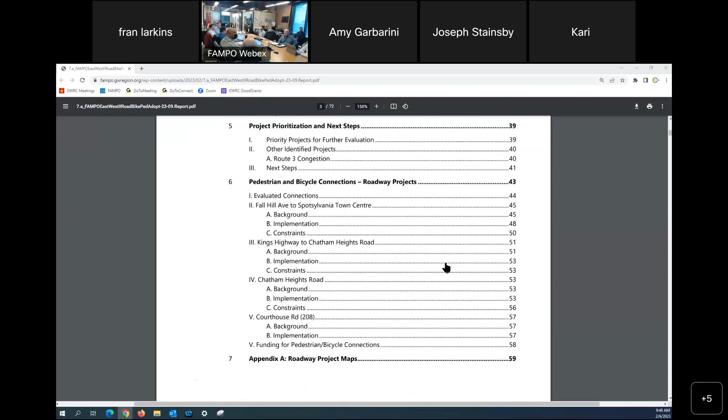Do you have a page number, really quick? It's near the beginning. Pull up the report, Curly. It's page Table 4, right, Paul? Yeah, table 4. Page 15. Okay, great, thank you. Page what? 15, that's where it starts. Page 15, but it's actual or PDF page 17, or 16 in your thing, if you're searching. There, yep, back up, that's 15. Is that the one, Paul? Yep, yeah, so page 15.

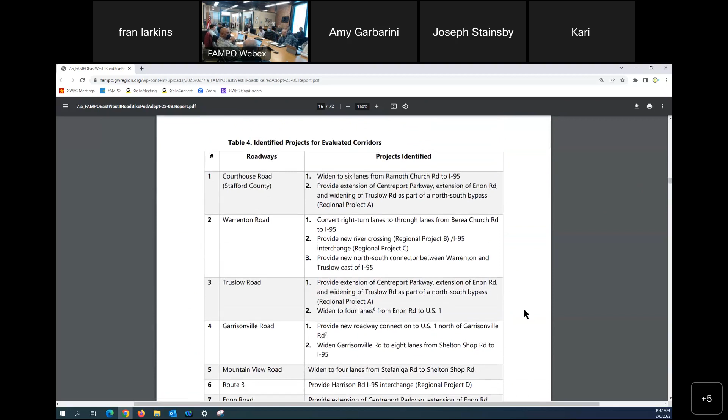So my question is, with regards to number 11, shouldn't that be 2 projects and not 1? Higher up on the table it basically lists 2 different projects. One would be the new river crossing, and the other would be the new interchange. Given that they're both pretty expensive projects, it would seem good to list them separately.

Yep, that's how we did it in other places, so we can make that change for number 11. Thanks for flagging that. Okay, thanks, Drew.

Any other questions or comments from anybody? So we've got 2 amendments from Matthew, which I believe Drew and Chris were saying is fine. They can make those changes, not a problem. And Paul's comment you've heard, they'll quite happily make that change as well. Any comments you want to make, Matt, on those 2 items?

Do you want me to mention them? Yeah, I would go ahead, just so everybody knows. Gosh, I do not know what page number.

The first comment was regarding the map showing the Western network, and it was showing the connection between Centreport Parkway and Courthouse Road as connecting at Austin Run Drive, where it should connect at Mine Road. So that'll be updated. The other comment was near the end of the document, describing the Western network and the proposal for that plan, adding a few notes to better discuss what improvements could happen regarding that project.

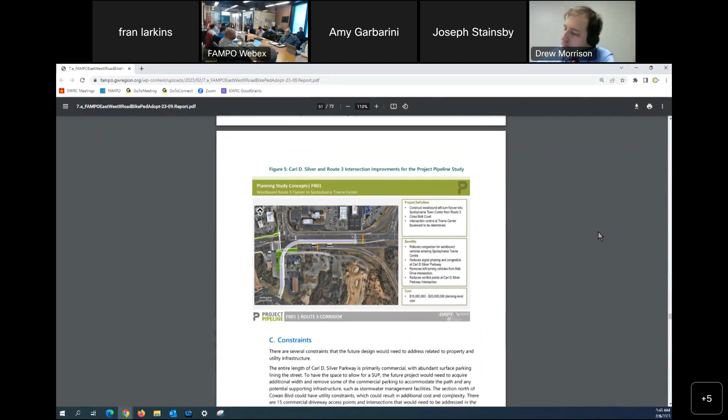It didn't mention anything along Centreport Parkway, and it didn't mention anything along Plantation Drive, whereas we'd be adding a road next to Centreport Parkway on both sides. We should see if we need to upgrade Centreport Parkway. We'd be adding a road next to Plantation Drive, and we should see if we need to upgrade that as well.

The report also indicates projects that are definitely being taken forward to the engineering phase, so that is a change in the report. It includes the Western Network, and in Spotsy it includes the widening of Harrison Road, etc. That is specifically mentioned in the roadway portion of the report, so you know what's going to be done in the final phase of the study, which is preparing towards funding applications — bike paths, transit projects, and roadway projects.

All right, any other questions for VHB? If you have any page numbers referencing Matt's items, feel free to shout those out, but if not, I think his description was clear enough. He did email it, and they've got the email and acknowledged it, so we do know where they are. Okay, any other comments or questions regarding this study or report?

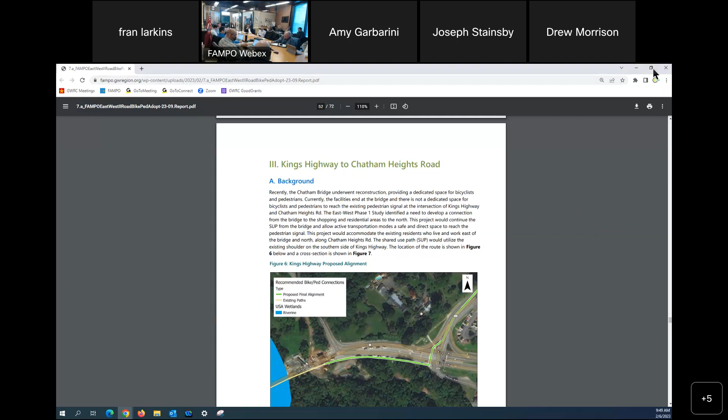So we will add this to 3 changes. This is not the end of the study, but this is the completion of this report. All right.

So if we have no other discussion items, I am going to look for a motion that endorses resolution 23-09, obviously with the 3 changes that were mentioned between Spotsylvania and Stafford counties. Can I get a motion to approve? Motion to approve. Second. All right, we have a first and second.

Do we have any discussion? All right, all those in favor, please say aye. Aye. Any opposed? All right, no need for a roll call. That motion passes for the resolution. Thank you so much, thank you all.

All right, I'm going to turn item B over to you, sir. Thank you, Madam Chair. This is Senate Bill 1137. The reason we put this on the agenda is because it made it out of committee and to the floor of the Senate in Virginia, and it looked like it might pass the Senate. In the end, it did not — it failed by 1 vote.

It was largely along party lines, but one Democratic senator in Richmond voted no. They had 20 votes and needed 21 for it to pass, so it failed by one vote. Local senators from our specific region were not in favor, and all the Republicans voted against it. So it did not pass through to the House, and effectively it dies. It may be resurrected in the next sitting, which is only next year. At the moment, there's nothing we can do about it.

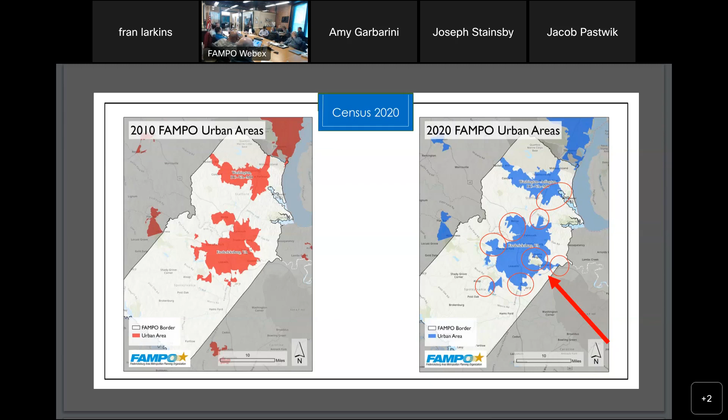Okay, can we move to the next slide? In terms of the numbers, the good thing is if you look at the bottom, the population figures - we don't have the housing units for 2010 because they didn't use that as a criterion in 2010. They now do, so that's a change in policy. But we do have the population of the urban area. For those who haven't seen this before, please remember this is not the population of the 3 jurisdictions - this is the population of the blue, the urban area only.

It was 141,000 in 2010 and 167,000 now. Remember, the policy changed, so it's not apples to apples - they changed the policy. So if they did not change the policy, my guess is that the population in the blue would be bigger than 167. We were even worried it might shrink the population because you now suddenly cut out all those areas that don't quite meet the thresholds. So it could potentially have made the urban area in our region smaller, and in some places it did.

We are lucky that it did not do that. We still grew in spite of the fact that they changed the criteria and made it harder for a neighborhood to be identified as an urban area. We grew in square miles from 71.8 to 89.6, and we grew in population from 141,000 to 167,000. So we did grow in spite of them messing with the criteria, which means that we're a fast-growing region. So even when they make it harder to count numbers, we still grow because we're a fast-growing region, and I think that's kind of positive, although it brings congestion.

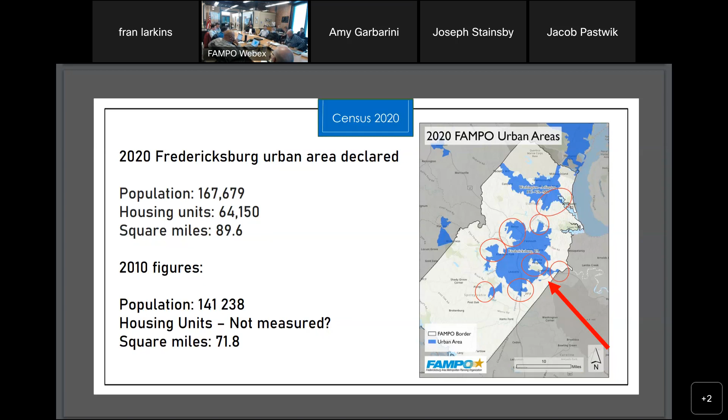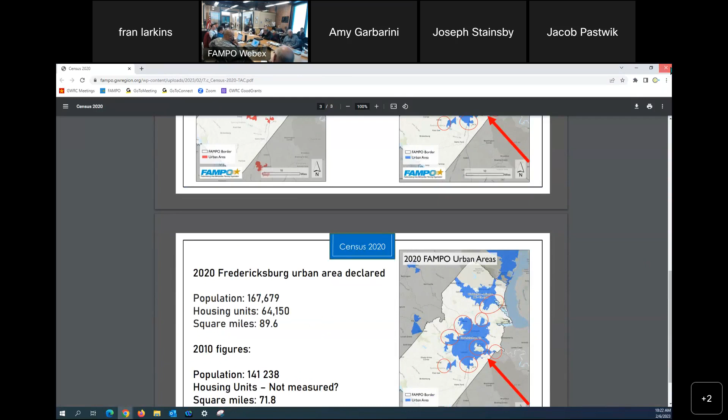All right, sorry you missed that excitement 10 years ago, Stephen. You regret it. I mean, FAMPO may add jurisdictions if it wants to, but it's not required to because the urban area did not force our hand.

All right, so turning it over to the next item, which is Ian again with the Freight Summit. Yes, the author of the report, Chris, is going to be available and attend the policy committee when this serves before the policy committee to answer more detailed questions on it.

We did present it to all those who attended the Freight Summit, so many of you have already seen this because you came to the Freight Summit and we sent you the draft report to review. We incorporated changes, but got a great number of useful information from Jacob at Spotsylvania, and we've incorporated a lot of that into this revised version of the report.

But we really think that, bearing in mind it was very difficult to get participants and very difficult to get truck drivers to fill in surveys, in spite of a Herculean effort, we put in the most effort ever to get people to attend something, I promise you. And we did not get a high number.

But we still did get a bunch of freight companies attend. Coley, if you can just scroll down to the list of attendees in the summit. Further. The report actually lists who attended. There's a table. There you go, so you can see there who all attended. We did get CSX, Harris Teeter, Hilldrup, IDX, etc., the Port of Virginia, DRPT, etc.

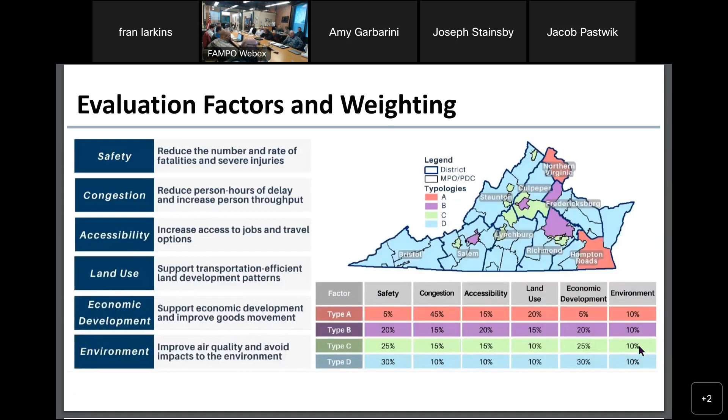I'm not sure that I need to go through the entire thing in detail, because I think all of you basically know this was a fantastic year for us. The numbers are all in your pack, and you've all had this pack since Wednesday. So just scroll down, I'm not going to go through these broad numbers, it's all been out there. The interesting part, if we could stop on this one, there's built in, I don't know if it's 12.5% or something, escalation money that's been set aside.

And there's also, when I listened into the CTB meeting, the 90 million over there is unallocated, so they could still allocate that money to projects. And there's also an escalation built in for projects that, for inflation purposes, need another 12.5%. Whether 12.5% inflation is the right number is a whole other question.

Next slide, there are our projects. The red ones came through FAMPO and GWRC, the yellow ones were applied for by the jurisdictions themselves. Honestly, I think this was a great year. It's just under $150 million in projects in total between the jurisdictions and FAMPO and GWRC. And it's 5 projects that we got funded at FAMPO and GWRC out of the 8 we submitted. So 5 out of 8 recommended for funding is a pretty good number.

We would love to always add another one, like maybe the Lafayette safety improvements would be a great one to add. It's the next FAMPO GWRC project, the next highest scoring FAMPO GWRC project on the list, but it's not the next highest scoring in the district, because some Northern Neck projects and other projects are the next highest scoring projects in the district. I would certainly love to add Lafayette Boulevard to this haul, but it is certainly a great one.

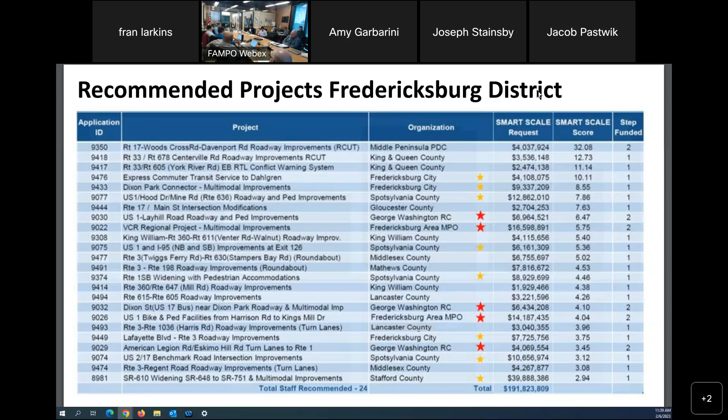So kudos to FAMPO staff and everyone around the table. Great job. We know I was the only one who was grumpy because we were all happy to have these engagements. Nobody was really nasty, we just told each other, no, that's not going to work, and it improved the project. We may have been tough, but we'll pretend it was all done with a smile. This is the reward for it.

As VDOT pushes us to make our projects better, we're like, why do we have to do all this work? It's almost like the teacher giving the child homework—that's why you got to do your homework so you can get a good grade. So thank you, VDOT. Michelle's projects made me grumpy, but they were valuable because we resolved them, which pushed the score up. So bring on the comments, I'll try not to get grumpy with you all. Kudos to everyone, thank you.

Stephen, did you have a comment? No, I'm just enjoying all of it.

All right, Paul. I'll just say it was a very successful round. Looking ahead with Lafayette Boulevard, I think to get that we need to probably have two applications—trying to shove it all into one didn't work for what we wanted to do. So just keep that in mind maybe for future rounds.

Absolutely. Good. All right, anything else on Smart Scale? Okay, I'll turn it over to Becky.

Yep, I want to compliment Matthew Lehane and the staff at FAMPO prior to my coming. When I came to interview for this job and looked at the website—the PMP and CMP page is award winning. The other, when I did crash training on VDOT's Tableau crash site, also off the charts. I've never seen anything like it.

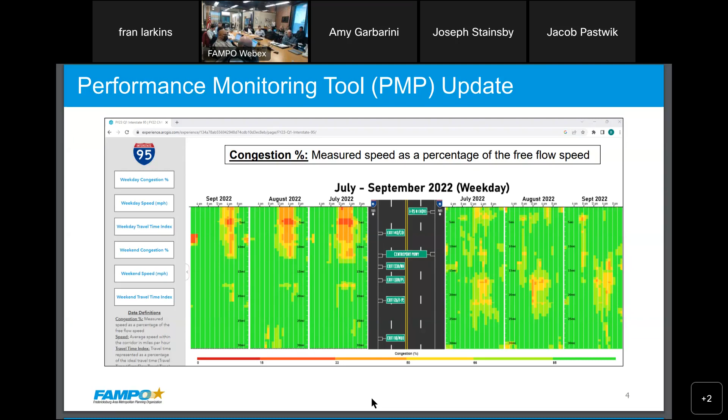The data is downloaded from INRIX, I-N-R-I-X, which collects anonymized data on congestion, traffic incidents, parking, and weather-related road conditions from billions of data points daily in more than 145 countries. The data is aggregated from connected cars and mobile devices, cameras and sensors on roadways, and major events expected to affect traffic.

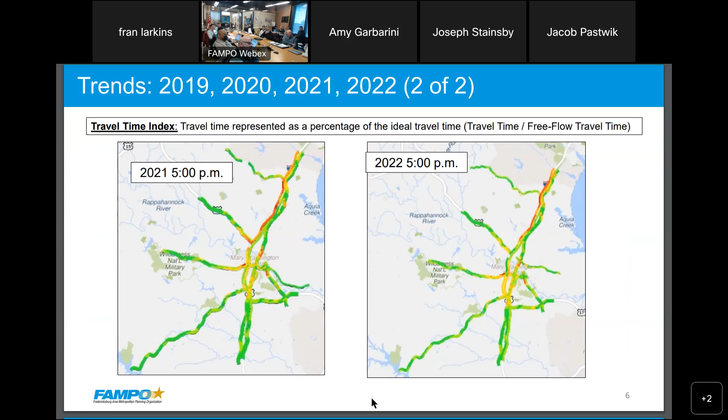2021 and 2022, not quite as ugly as 2019. We all know the trends, both intermittent and permanent, that happened since 2019. A lot of projects have been completed on I-95 to relieve congestion, and permanent changes have been made in our workplace. Prior to 2018, an employee's annual performance evaluation would include how promptly they were at work on time. I think everybody is realizing that allowing flexible work hours to let employees safely get to and from work matters. We've changed a lot since 2019 in a lot of ways.

I'm using my crash analysis experience to take the traffic volumes from P for P, the performance for planning tool, and then taking the subcorridors and using the Tableau and Power BI crash tools to get a great multi-year view of crash volume so we can look at real accurate crash rate data now that it's available. That's the melding of the crash tool and the INRIX data we get here, as well as the volume to capacity ratio, which P for P has calculated. The performance for planning tool also gives you the freeway capacity, which is great because I can get the traffic volume and know from P for P how to get that capacity to do a true volume capacity ratio over time. The volume is updated, and that capacity is such an important number. And that's my last slide.